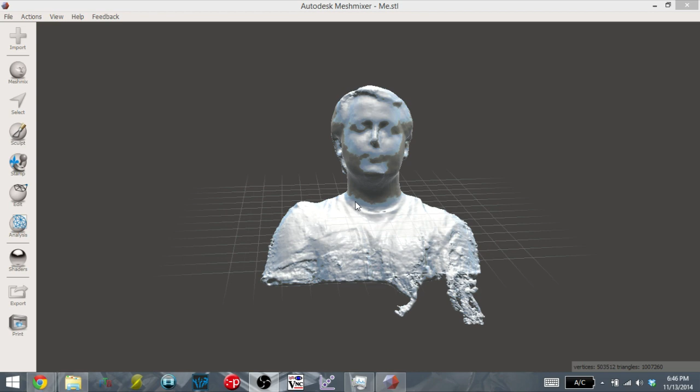Right now I have a scan of me made using an XBox Kinect and some software, and I'm going to use this as the head of my own bobblehead.

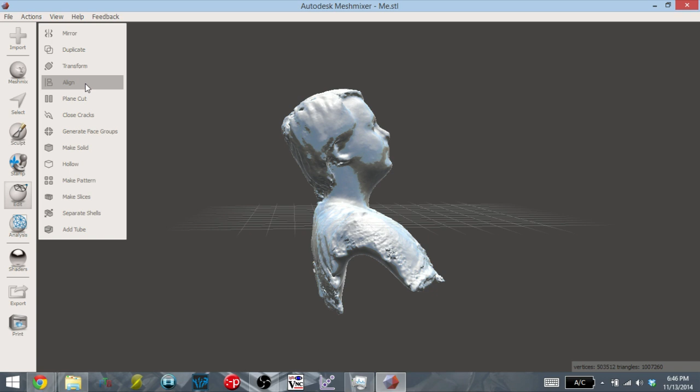But before we can put it on and get it printed out, I'm going to have to do some cleanup. The first thing I'm going to do is chop myself off at the neck, because I really do not need anything below my neck. This is just going to be the head. I'm not going to use the body for anything.

So I'm going to take a plane cut, and I am just going to cut everything off from the neck down. That looks good. So boom. Now that's cut, I have just the head that I'm going to work with.

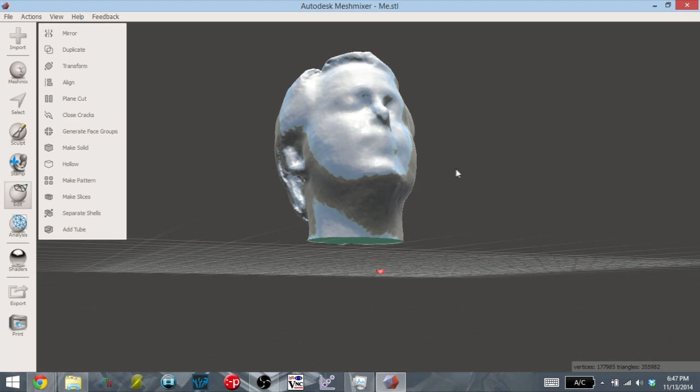The next thing I need to do is remove some more of the neck. The way the bobblehead sits, I don't want it to look like it's just a spring going through my neck. I want the head to sink a little bit lower in the shoulders. So what I'm actually going to do is remove some of the neck in this area.

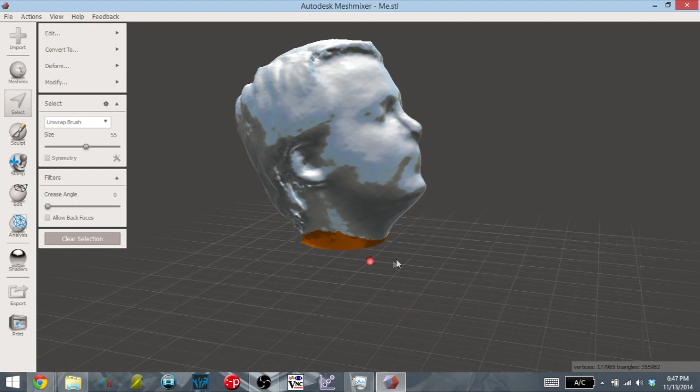I can do that by going to select, and then I can just slice away an area that I want. If I cut something like this, let's make it a little bit more than that. That'll cut away a lot of the bulk of the neck. I can just click delete, and boom, it's gone.

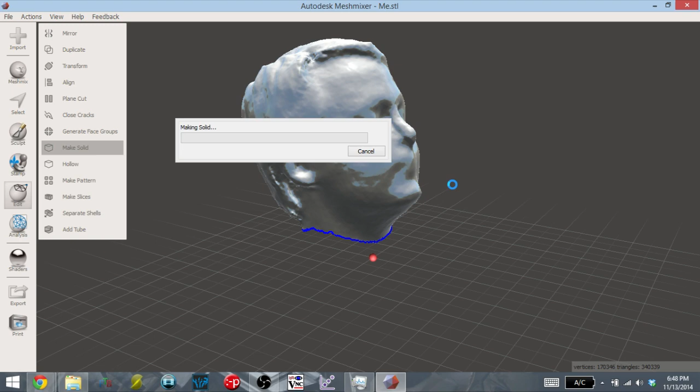But now there's just this hole in my head. What am I going to do about that? Well, luckily, Meshmixer has an option to make an object solid. If you go to edit, you can do make solid, and this is going to run, and what it's going to do is fill in that hollow area and fill in the bottom. Look at that, that looks great.

I'm going to adjust the settings just a little bit, make it a little bit more accurate. So I'm going to increase the density and updates. There we go, so the bottom's filled.

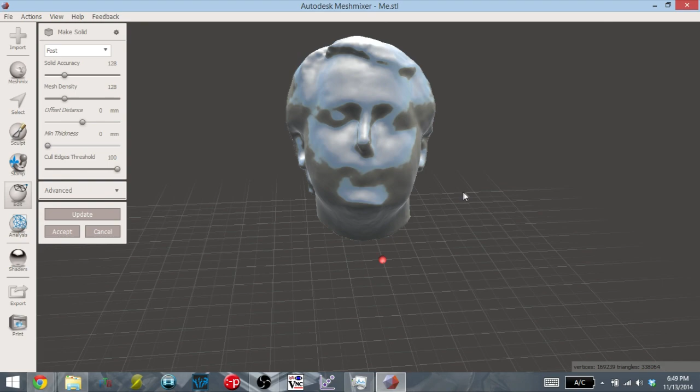That's good. One of the last things I'm going to do to clean up this model is in the top of my head, the scanner didn't quite fill in everything. So I'm actually going to use some sculpting tools to fix that.

If you go to Bubble Smooth, you can get in here, and it's going to smooth out wherever this brush shows. So here I'm just going to fill in this area and clean up the hair a little bit so that it looks a little more natural. So there we go, that looks good.

So with my scan cleaned up, now it's time to put a hole in my head. In order to cut the hole, I'm first going to design a shape of the hole that I want to cut. I want to make sure that the shape is the right size for the spring.

And I'm going to do this using a program called DesignSpark Mechanical. It's made by a company called SpaceClaim, and it's a really nice free computer-aided design program. It has a lot of amazing features, and it's really intuitive to use.

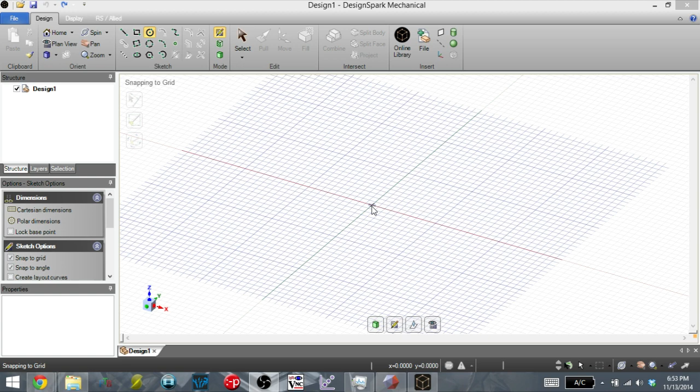So in order to design the shape that I'm going to subtract out of my head, I'm going to first click on a circle and draw a circle. I know I want that to be 15 millimeters in diameter. After you draw a shape, you can click it and extrude it. I want this to be 12 millimeters high, and look at that, it just draws the shape right there.

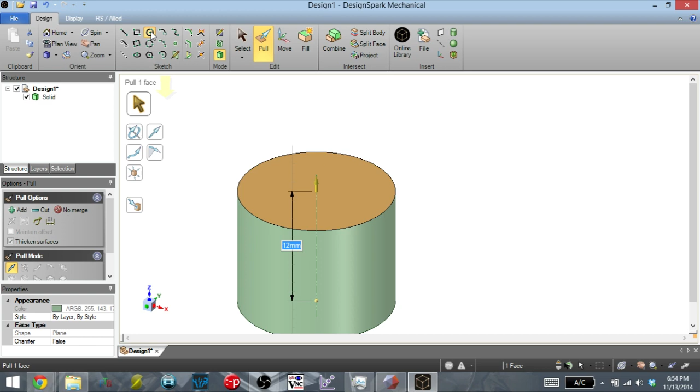Then from that, I'm going to draw another shape, and this is going to be where the spring actually rests, and you can see that in a second. I know that the spring, when I measure it, is 7.75 millimeters in diameter. So I'm going to make that circle, and also extrude that up another 8 millimeters.

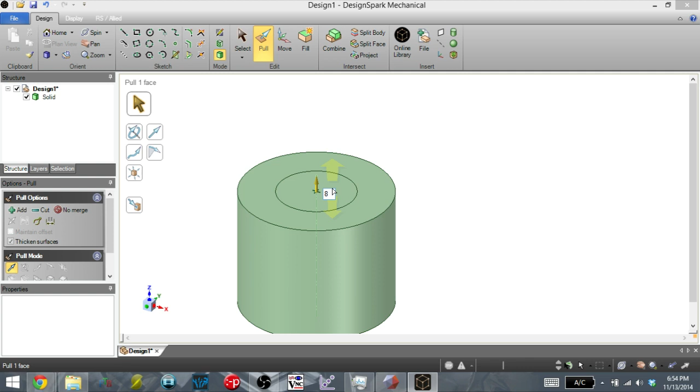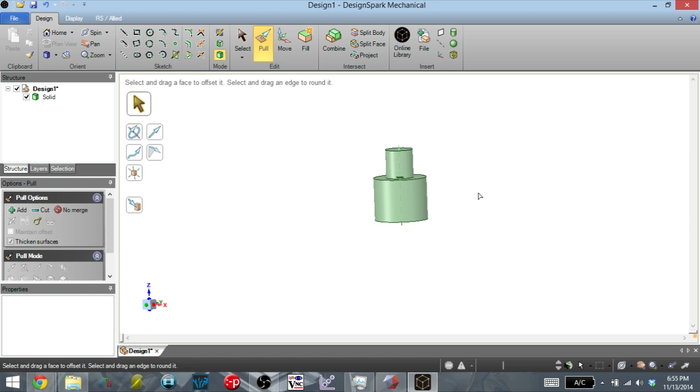So this is now the plug, the shape that I'm going to subtract out of my head. The head is going to be up here, and then this is the size of the spring, and this area will be cut away so that the spring has some way to move so the head can bobble. So I'm going to export this as an STL, and I'll meet you back in Meshmixer.

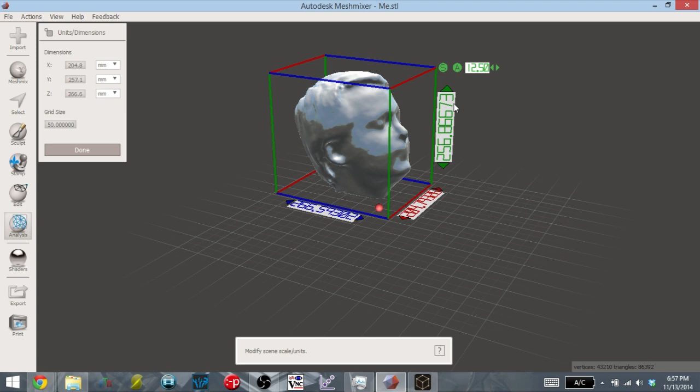Before we import the plug and cut away that shape, we're going to have to scale down my head, because right now this is a full-size scan of my face. But luckily, Meshmixer can do that pretty simply, as once this object is selected, you can go to Units and Dimensions, and it will show the dimensions for each of the axes right here. And I know that...

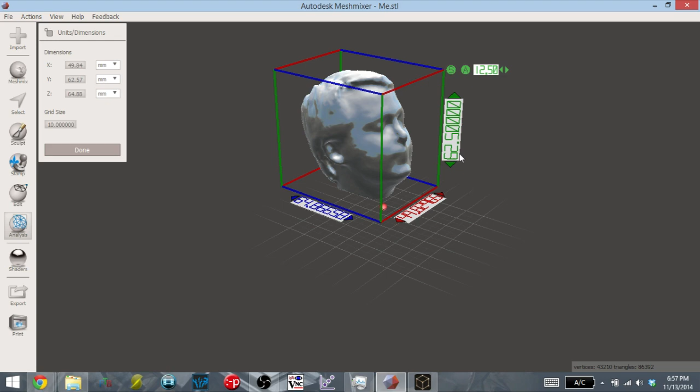After experimenting and playing around with some calipers to see what I want, my head to be about 62 millimeters high. So I'm just going to click and drag and bring that down to about 62. It doesn't have to be perfect.

There we go, 62.5, that'll be great. So now we have the scan of my head that's been cleaned up and made ready for a bobblehead, and it's now scaled to the correct scale that I want. So now we can import the peg that I designed in DesignSpark Mechanical.

So now I'm going to import it, and it's asking me if I want to shift its position. Yes, I want it to get closer. And now you can see that I have my head, and we have the plug here.

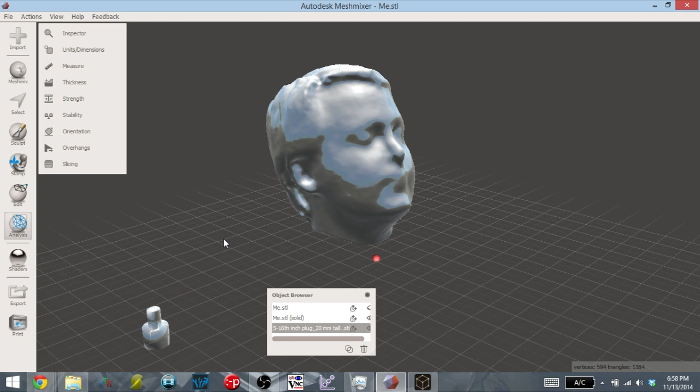So now I'm going to click on the plug, and I'm going to transform it, which just means that I can move it around. And I want to make it so that's about, with the object browser, about 0 here, and I'm going to move it up. And we'll see how this looks.

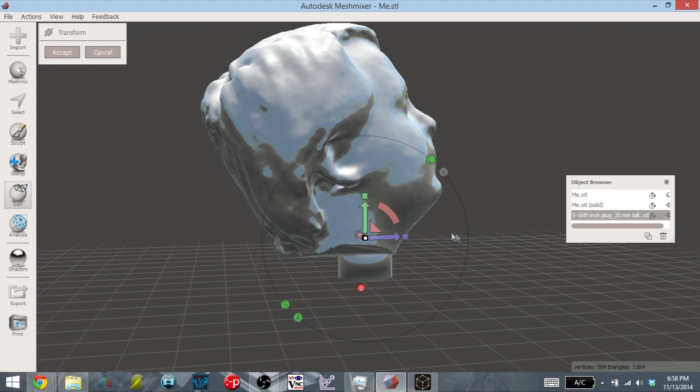So right now I'm going to move it back a little bit so that it's in the middle of the hole, and I want this to go up so that it's barely sticking out of the bottom. There we go, that looks like it's about position.

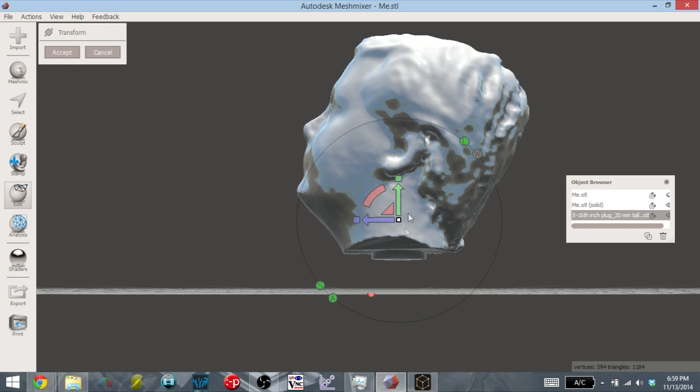So right now I have just moved that plug inside my head. Next, we're going to do what's called a Boolean difference. I'm going to tell Meshmixer to take the shape of my head and subtract out anywhere that the plug is. So you can do that by selecting the object that you want to remain, and then Control-Shift the object you want to delete, and it will bring up this option where you can do a Boolean difference.

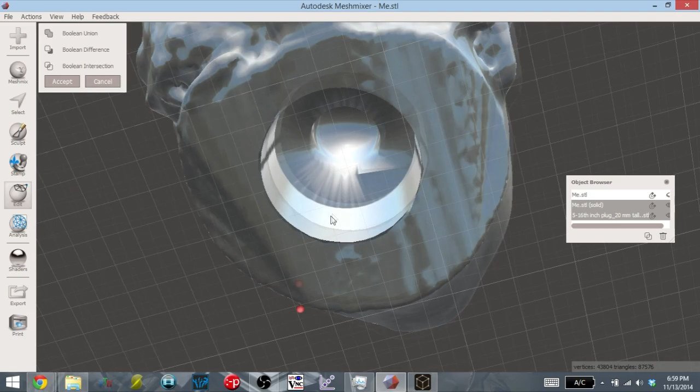So I'm going to select that, and now you can look at it. You can see that it took that plug and cut out the shape of the plug in my head. If I turn on the wireframe, you can definitely see that this plug is missing. And this is going to be great because this will allow the spring to slide up in this cavity, and then this larger cavity is going to allow the head to bobble.

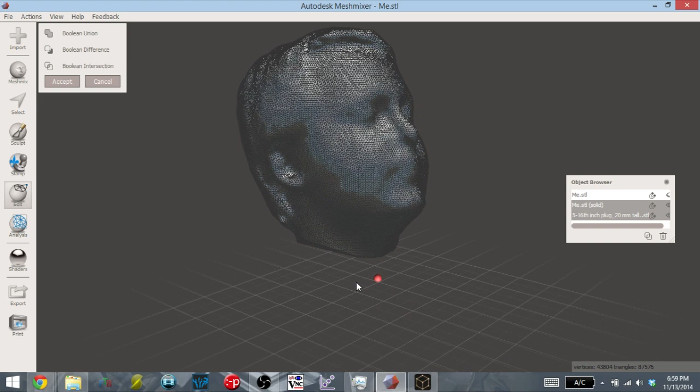So now that the head is complete, this is going to be ready to print. I can turn my focus onto the body.

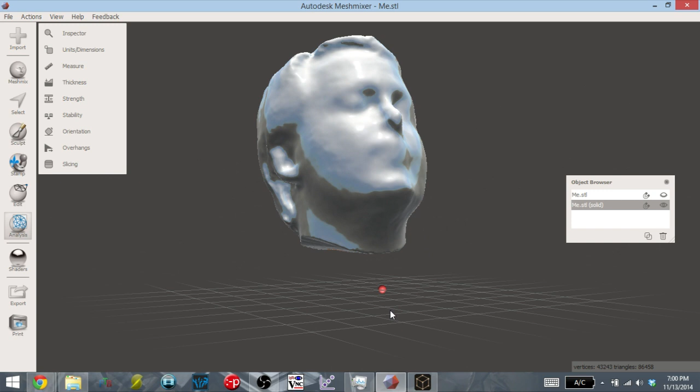One last thing before I actually go to 3D print this. You have to be aware with 3D printing of any overhangs. Any place like my ears or the inside of the plug right here, any place that doesn't have any supports naturally by the object is going to need supports when printing. And while Slicer supports are okay, and Meshmixer supports are also pretty good, I want to minimize the amount of supports I need for this.

And Meshmixer has a great tool called orientation. What it's going to do is it's going to try to rotate the object and optimize the amount of supports needed, trying to remove as many supports as possible. So if I click orientation, it's going to flip it around and find the most optimal layout.

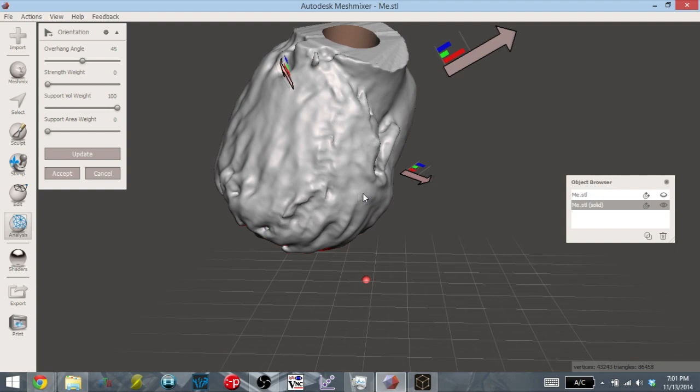And what it looks like is it wants to print it upside down, starting with my hair. So if we zoom out, this is how it would be printed, with my head on the bottom and then printed up layer by layer towards the top, to reduce the amount of support material needed. So I'm going to play around with this a little bit, kind of tweak it myself, because I don't want it starting here.

I kind of want to start in this hair area, just because it'll be easier to hide any blemishes here. So I'm going to rotate that around before I actually export this file to my 3D printer. But that is the last step.

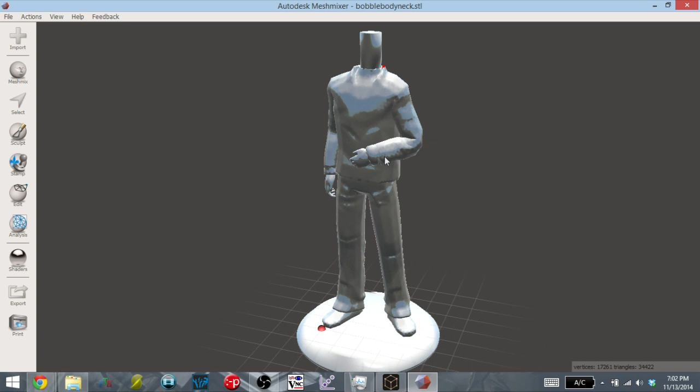Now we can focus on the body. This is the model I'll be using for the body. I don't have a good full body scan of myself, and since this is just a prototype, it doesn't really matter. So I went to Thingiverse and I found this model, and it looks really nice. The first thing I'm going to do with this, there's not going to be too many tweaks, but I need to scale it down first.

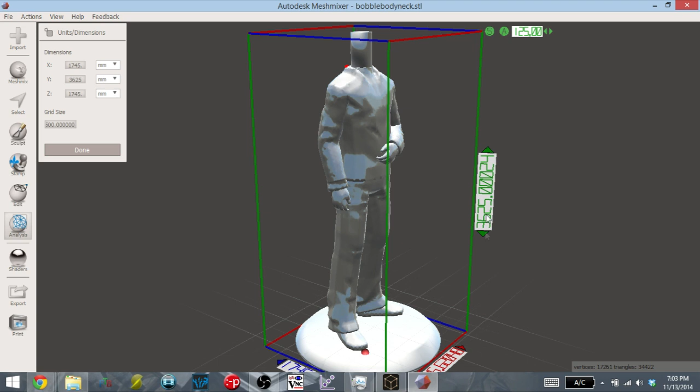I also figured that with the size of my head being 62 millimeters, I want the body to not be quite in proportion as the head. A bobblehead always needs a much larger head than the body. So with playing around with calipers and scaling, I found that I want my prototype body to be about 105 millimeters in height. So I'm just going to shrink this down until I get to about 105 millimeters. 125, it's going to go back to there, and then I can adjust the scaling here. So 105. Perfect. So now that this is 105 millimeters tall, we can start work on the next step.

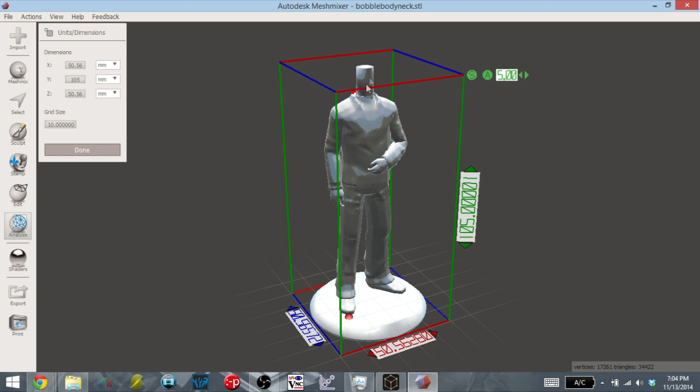The next stage is I'm going to cut off this head. I want to use the same kind of technique that I used for the head. I'm going to actually cut a hole into the body for the spring to rest, rather than wrapping the spring around the post. So I'm going to do the same kind of thing that I did with my head. I'm going to take a plane, tell it to remove anything higher than this. So swipe it down, and you can see that it's going to cut off that neck portion, and that'll be great. So accept that and cut it, and that'll be good.

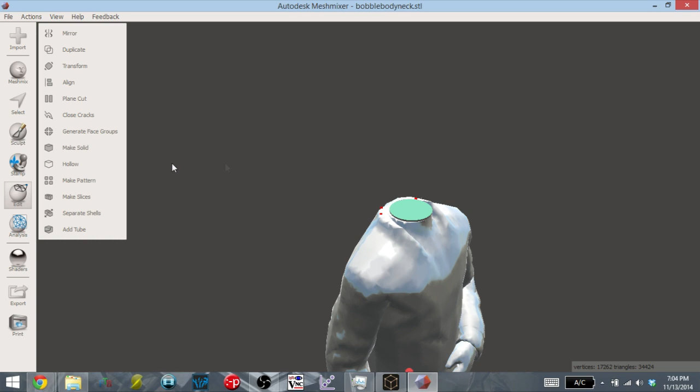Next stage is to import the plug that I designed in DesignSpark, and I'm also going to do a Boolean subtract and cut a hole here. So I have the plug and I have the body. Before I do the Boolean difference, I have to do some cleanup on the body first. Right now, Meshmixer is giving a few errors. You can see these red dots.

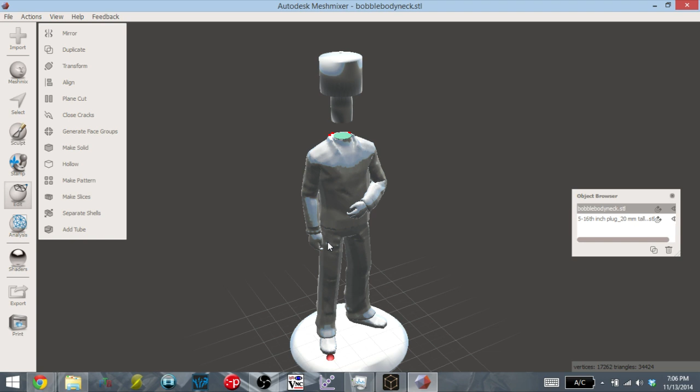So what I'm actually going to do is make this solid as well, and adjust the parameters so it looks a little better. Okay, so I have made this solid. Meshmixer now thinks that this is completely solid. And now I should be able to cut out the plug from the body.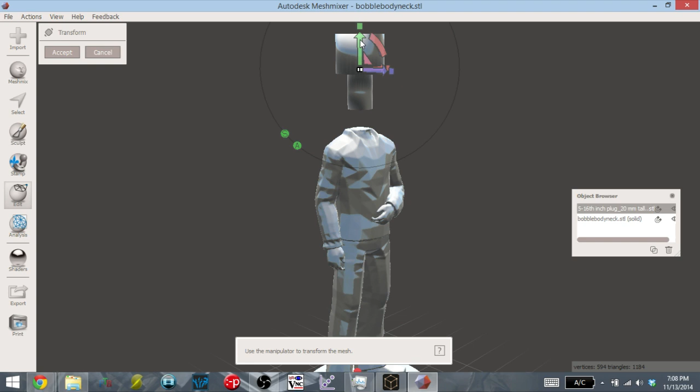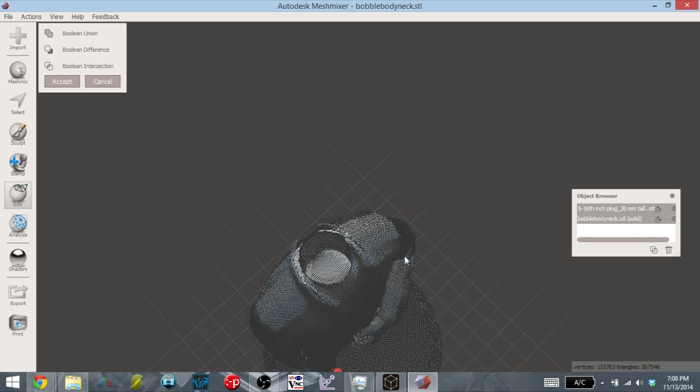So I'm going to select the plug and bring it down. I kind of want it to cut a little bit into the body so that the spring has some place to rest. So you can see the plug will cut into the neck here, and that'll be fine. So I'm going to select the body, select the plug, and subtract out the plug. And look at that, there's a perfect hole in the center. If I turn on wireframe, you can see that the hole extends into the neck, and this will be a perfect resting point for the bobblehead itself.

So I'm going to accept, then I'm going to export this as an STL file, and we can get to printing the bobblehead.

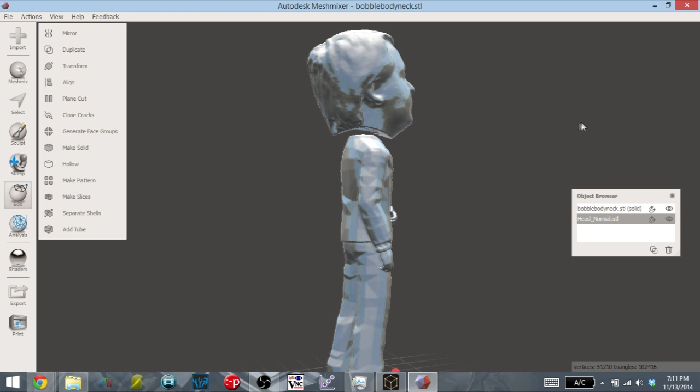So here is the bobblehead. I just imported the head that we cleaned up before, and I put it over the body. And so this is what the final product is going to look like. It's going to have my head, there's going to be the spring inside of it, and the spring is going to go into the body, and hopefully this will turn out pretty well when I 3D print this.

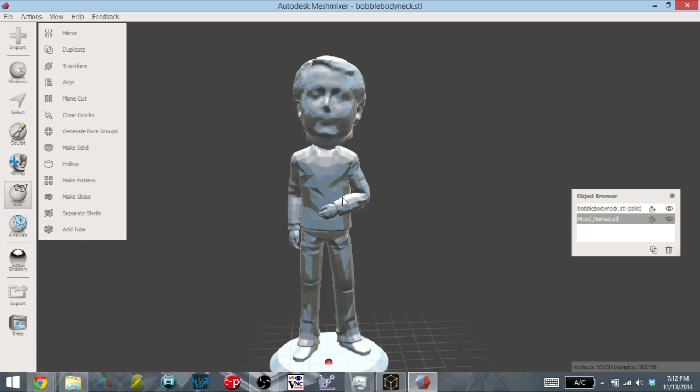So it's always a good idea to double check the scaling before you start printing, because it's a lot easier to make a change now than it is to wait for the print to finish and then decide you want to change something. So always double check your work. I think this looks pretty good for a first prototype. So I'm going to go ahead and slice it, and print it out, and I will see you guys when the print is finished.

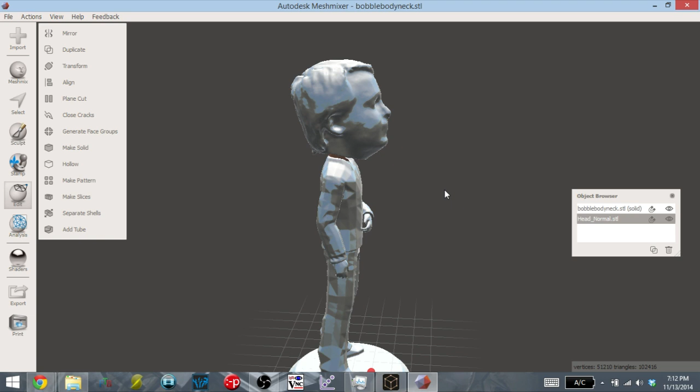Okay, after a little bit of adjustments, we have a bobblehead.